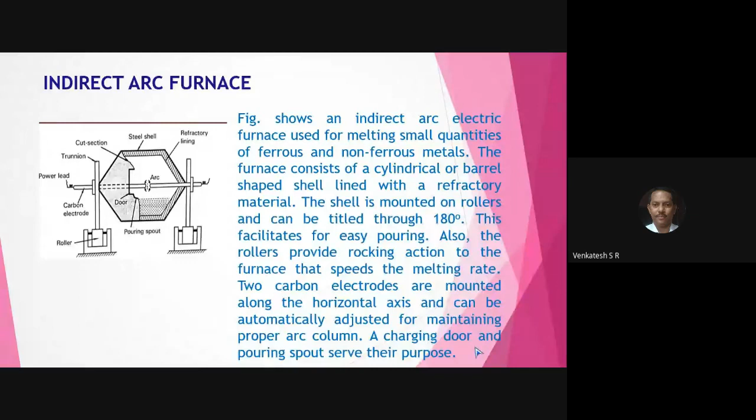Last class we discussed the indirect arc furnace and direct arc furnace. Today we discuss the cupola, a very important and very interesting one, the conventional method of producing cast iron. All of you write down cupola furnace.

First, come to the bottom or base of the cupola furnace, and how the cupola furnace is constructed. This green line indicates the floor. On that you have a brick foundation. Special types of bricks are available for the cupola furnace, and the foundation is made using these special bricks. On that you have a pillar like this.

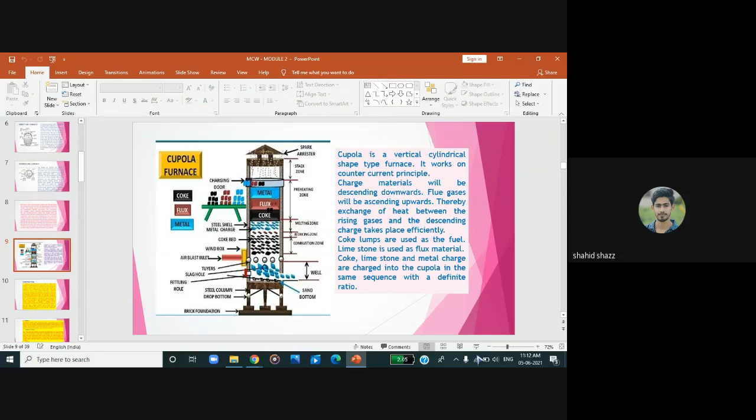See, in the cupola, 3 types of charges are used: metal, flux, and coke. Metal with blue color, flux with maroon color, and coke with black color. 3 layers.

Here, the metal is melted because the flux and the coke are burned together and form the liquid metal, and this is called the melting zone. Below that, there will be a reducing zone. Here, the carbon is mixed with the metal and forms the cast iron. This is called the reducing zone. Below that, there will be a combustion zone.

This is the main zone where the 3 charges, metal, flux, and coke, are combined together, and the combustion of coke takes place, which produces an enormous amount of heat, enough to melt the metal and flux and make the liquid metal.

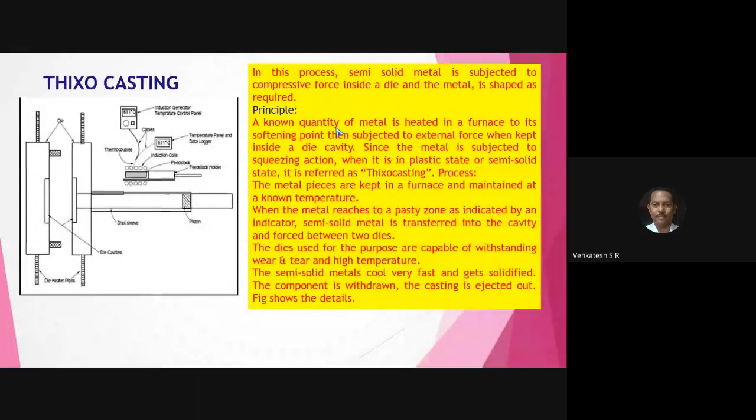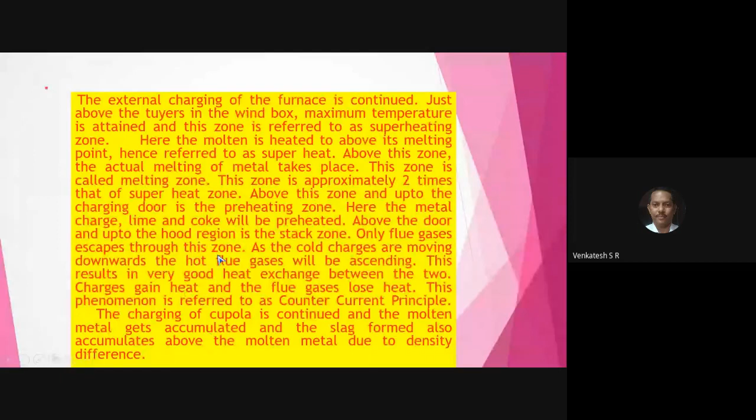See, all of you observe here. This is the explanation for construction of cupola. Next, this is the principle of working of cupola and charging of cupola. Next, melting of charge, flux and coke inside the cupola. Next, after completion of melting, how to remove the cast iron from the cupola, that is tapping slag and molten metal. That is the waste material slag and the molten metal. How to remove the molten metal, that you study in tapping of slag and molten metal.

Next, drop down the bottom. That is, after tapping the molten metal, the bottom doors are dropped down. Slag drops out of the furnace. The dropping down is particularly used in cupola. The waste material present on the surface of the liquid metal is removed through the dropping down. After the complete removal of the liquid metal, in the final, the slag is present on the surface of the metal. The molten metal is removed, and also the slag, which is removed from the dropping door.

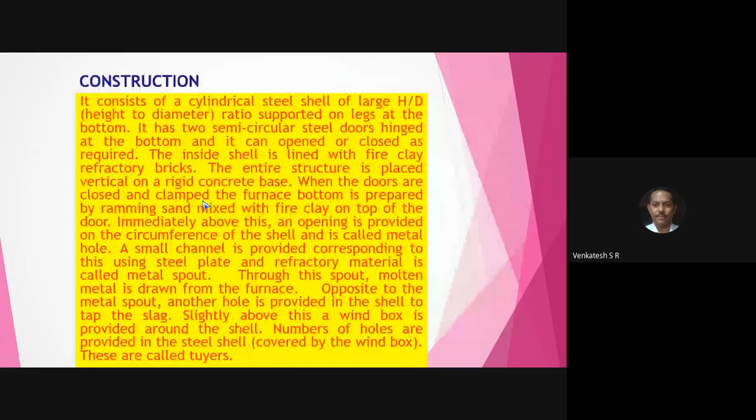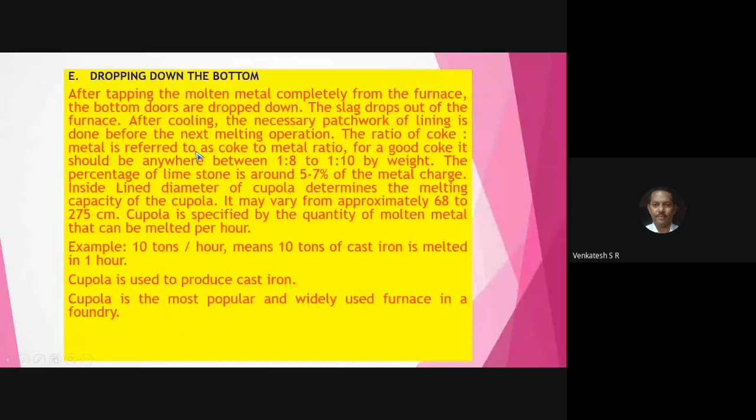So what you have to do today, go through the explanation of construction of the cupola, working of the cupola, charging of the cupola, melting in the cupola, and removing of liquid metal, molten metal and slag. And next, drop down bottom, from that they remove the slag.

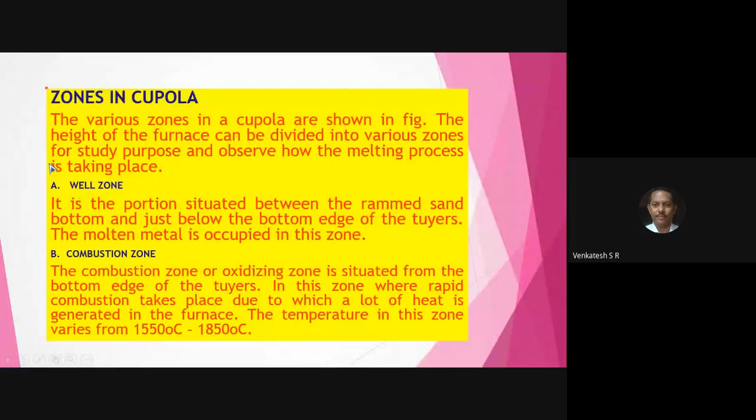And in some of the question papers, you have a question on zones in cupola, that is well zone, combustion zone, reduction zone, preheating zone. Preheating zone, reduction zone, combustion zone, and well zone. You have to explain all the 4 zones in cupola. So this much of explanation is very much essential for cupola.